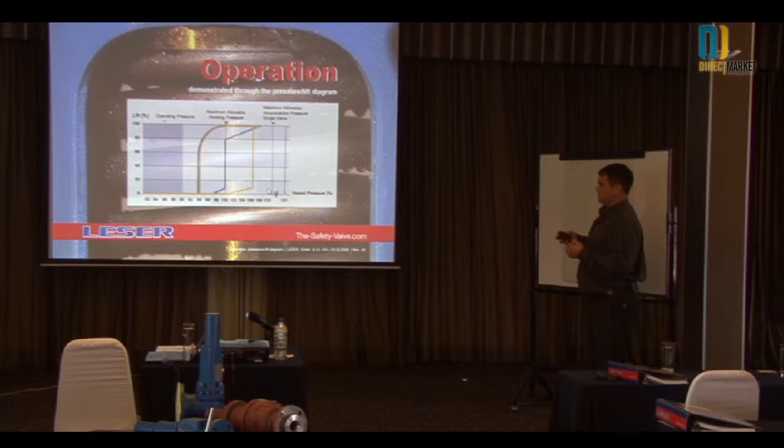Or the maximum allowable pressure for your system. So you want to obviously relieve the pressure before it gets to a critical mass. The valve is still closed at 90% of the set pressure.

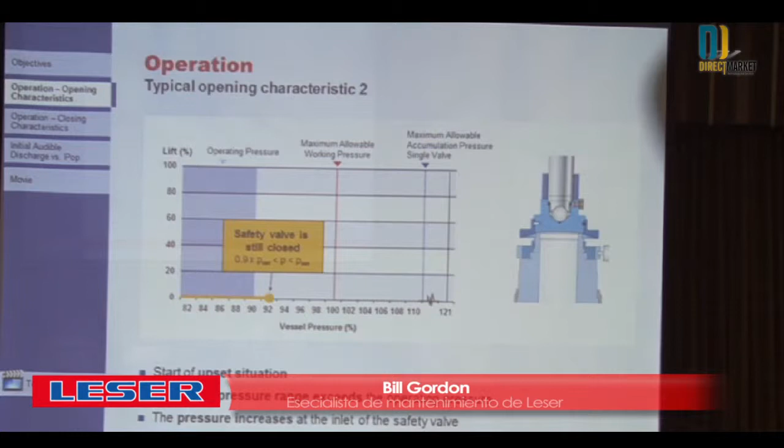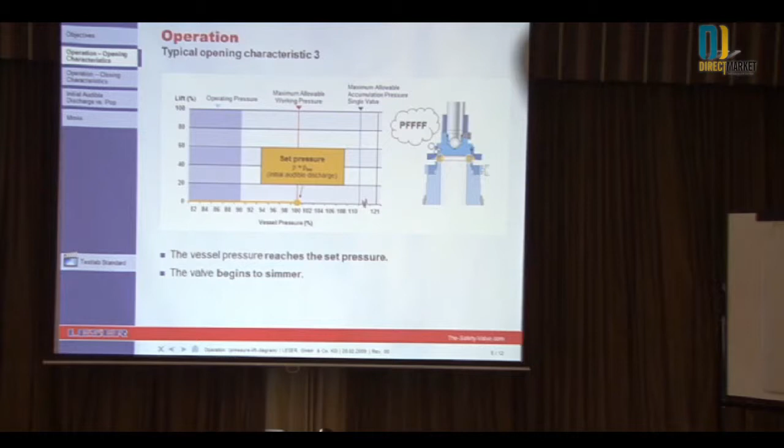And here, the valve starts to open at 100%, which is the set pressure. That's our initial audible discharge. That's how we set the valves.

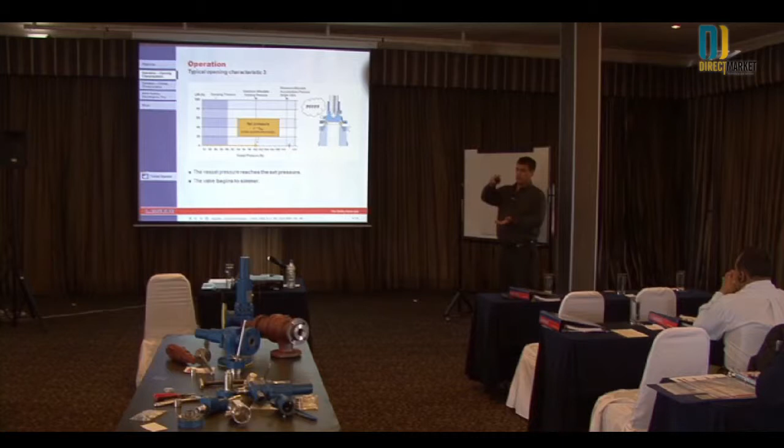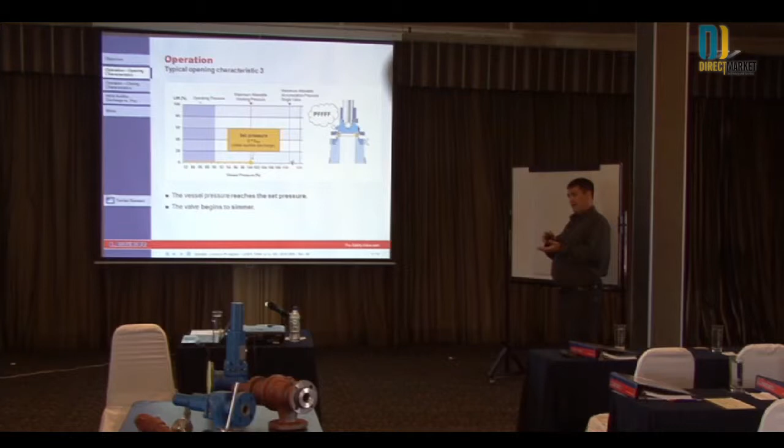Our competition sets the valve where the valve is completely open. That's the set pressure. We bring the valve up to the point it makes noise, and that is the set pressure for us. That way, pop comes later.

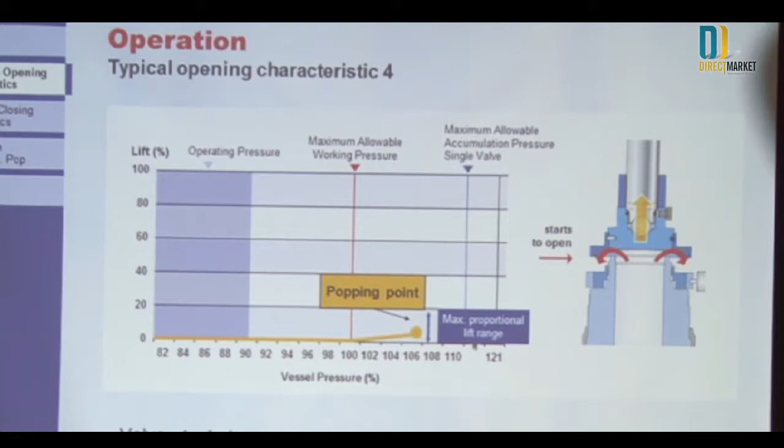And you will be able to run your processes closer to the set pressure, so the safety relief valve won't waste material.

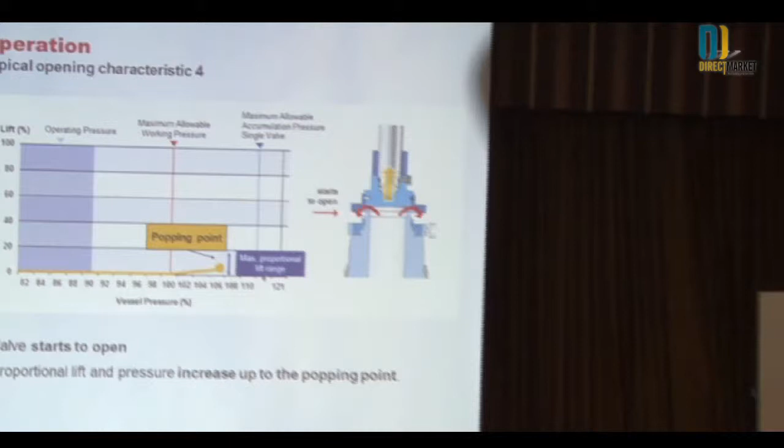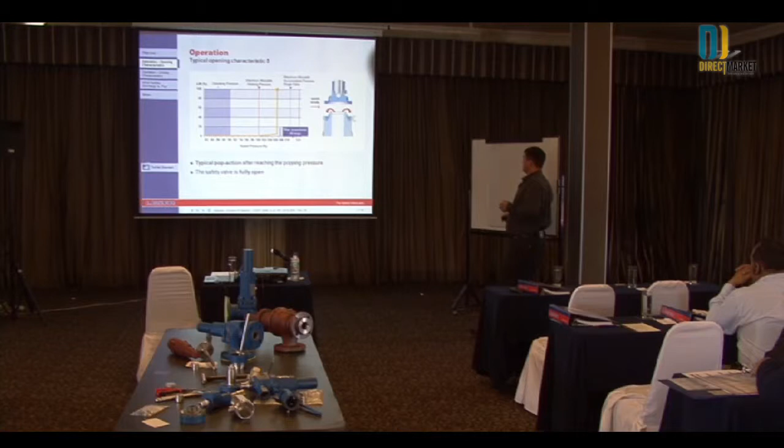And then our valve pops before the 110% overpressure, so it's relieving the media.

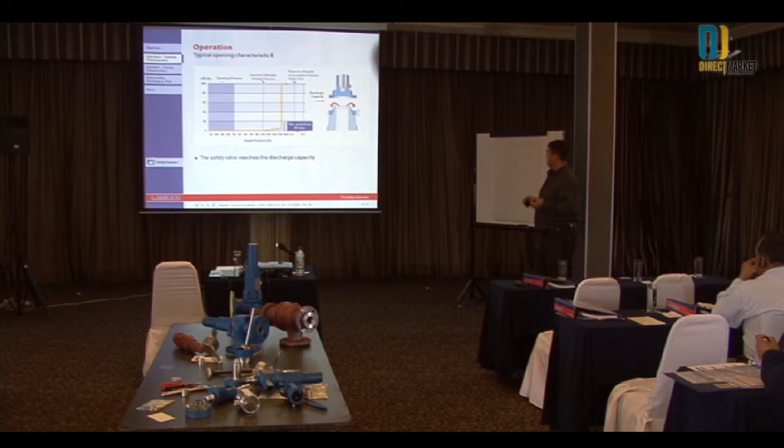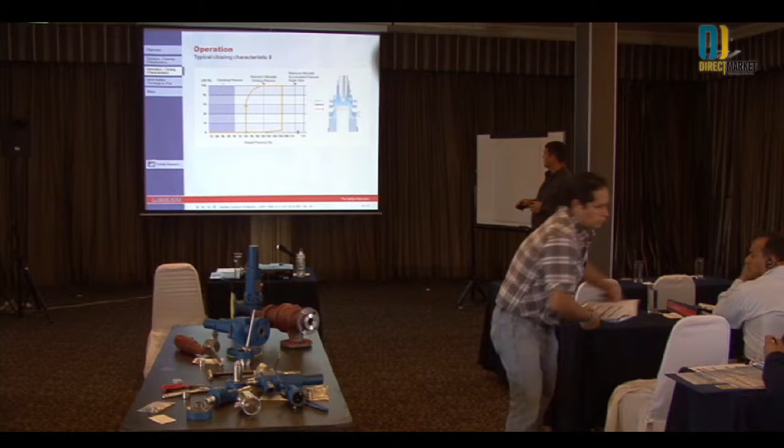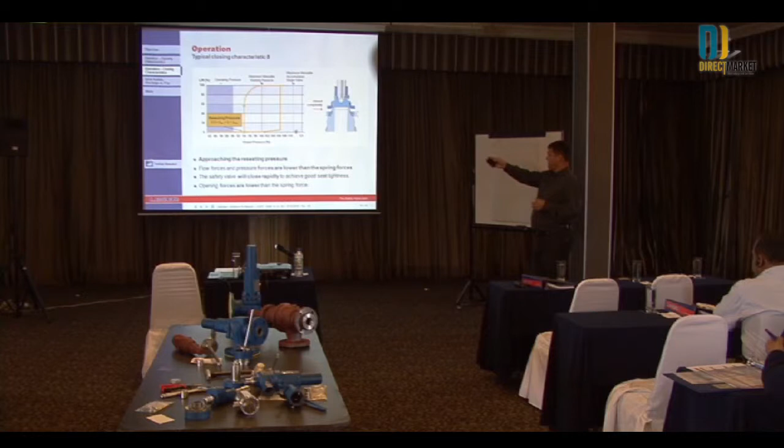ASME says the valve must reseat at 90% of the set pressure. So if the valve's set at 100 psi, the valve has to be reseated back at 90 psi.

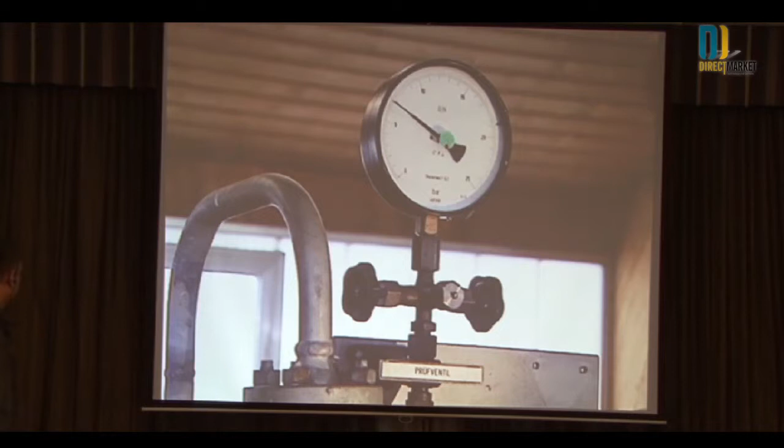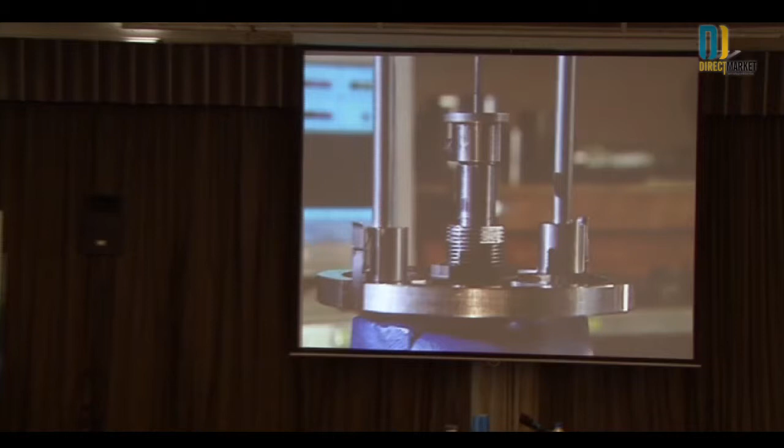Even though we say we don't set our valves at pop, our disc and seat are lapped so well that when the valve actually opens, most of the time you will hear a pop. It makes a popping noise. But it's not designated as pop. That would be the first initial audible discharge that you would hear.

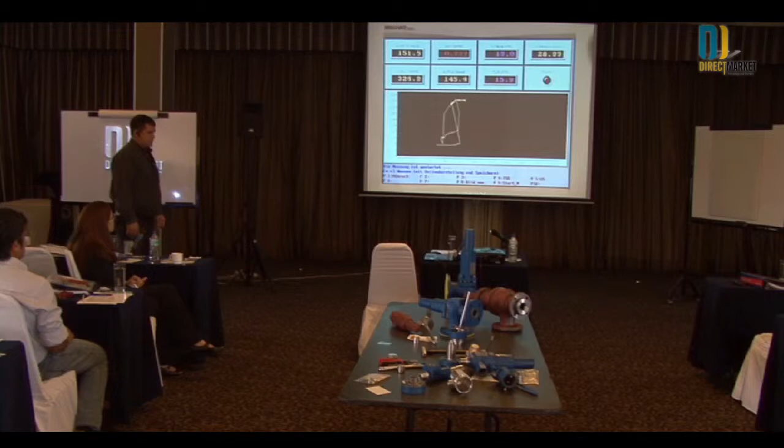But in some of our valves, like with an elastomer seat or different combinations, it's not going to really make a pop. Our metal-to-metal seats will pop a little bit. They'll make that noise.

I'm sorry, I can't remember exactly what it was, but anyways, most manufacturers, the US manufacturers, set their valves at pop. We explain ours as at initial audible.

So that's basically what I want to point out to you guys in this. And so here's the NB18 Red Book.

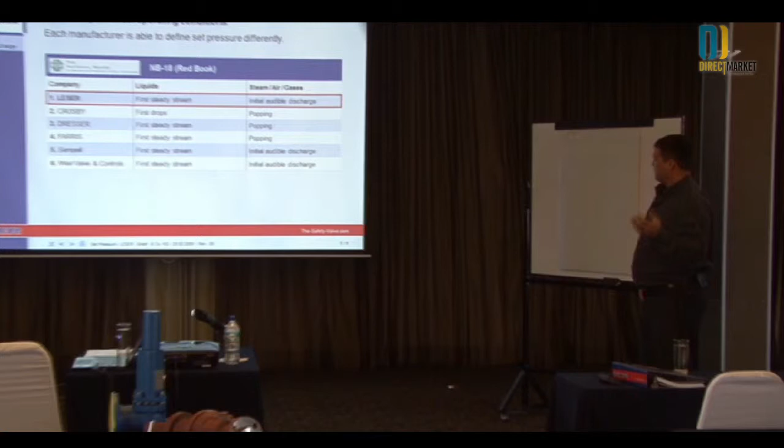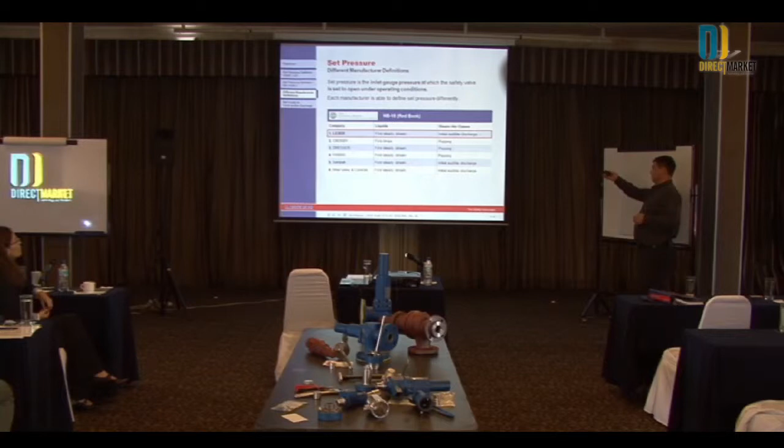If you looked up that NB18 and you were actually able to download all the information from it, you would see a list of relief valves on steam, air, and gas with initial audible discharge next to it. And then on the other hand, you would have all our competition with pop as their designated set pressure.

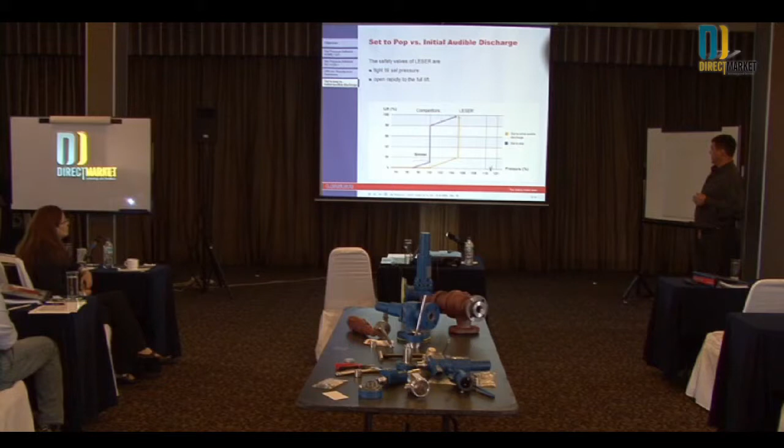Again, this shows a diagram of our competition's valves simmering before the set, before 100 percent, and ours are staying closed until then.